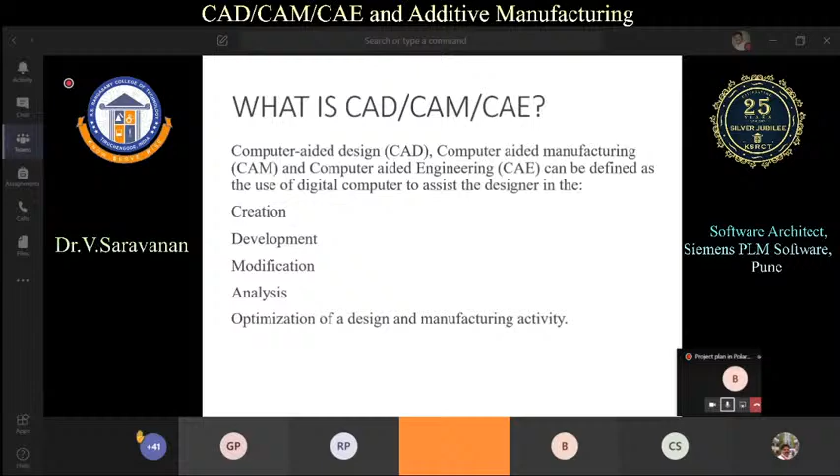As we know, CAD, CAM, CAE software - we have been using this software for various applications for designing and analyzing for the last few decades. These softwares are used for creating a model, developing, analyzing, and optimizing 3D models. Basically, we know this is a computer technology - CAD, CAM, CAE is nothing but a computer technology, and it will solve many of our design and analysis problems.

We might have encountered various CAD, CAM, CAE software in our day-to-day life. We might design some real life components, and do the assembly and analysis - all those operations we might perform. But the industry scenario is ultimately higher than what is expected. There is always research and development going on in real industries, and they are always looking for advancement in this area.

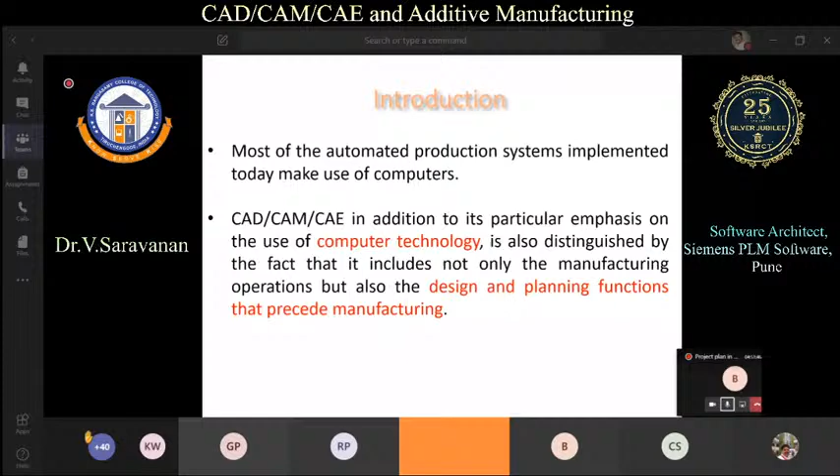So what we know is we will create a sketch, and we will create a block, and we will create secondary features, like we'll do some cut, and we will do fillet and chamfer operation. That's what we understand as a CAD model, but it is not just this much - there are a lot more things.

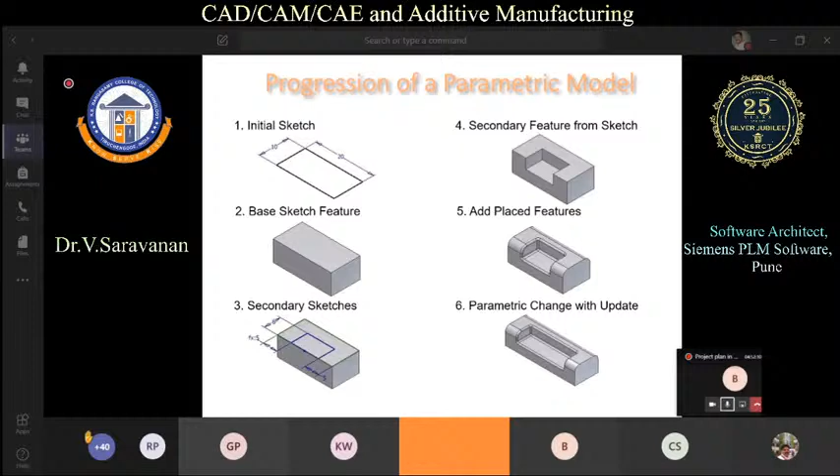So initially, if we see 1 or 2 decades before, we will use blueprint drawings. The blueprint drawings will be very big. The manufacturer will see that blueprint drawing and do operations in the lathe and create the models. But today, if we go to any manufacturer, they mostly won't use blueprints because the advancement in these areas is high.

So the reason, if you see 1 or 2 decades before, CNC evolution is bringing this CAD CAM systems up. Not only CNC brought this CAD CAM system up, other systems like computer hardware, software, all those contributed to CAD CAM, CAE applications softwares to bring it to this level today.

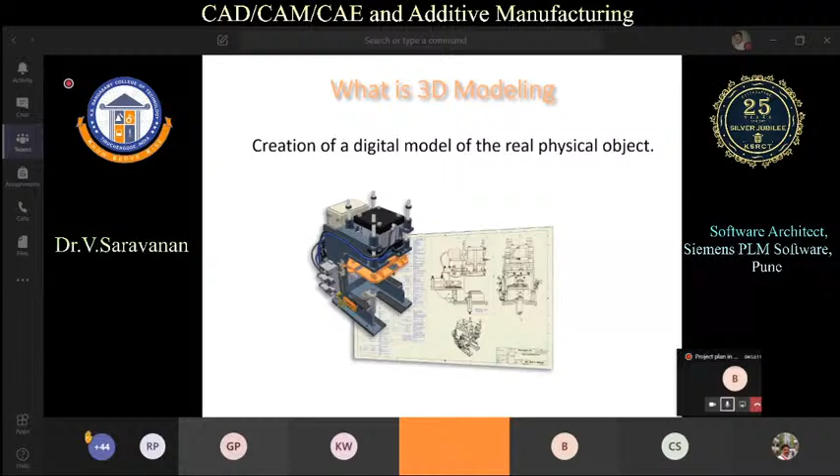Because of this, so far we encountered this much challenge, and we could make this kind of outputs. Not only is it aesthetically good looking, it has good performance. If you see an olden car, it will give only 10 kilometers or 8 kilometers per liter petrol. Nowadays it is giving more than 20 kilometers. That is the performance. It is lightweight, the materials are different. For all those things, these kinds of software's contribution is too much. It is contributing so much to this kind of technology, so that only it could be possible.

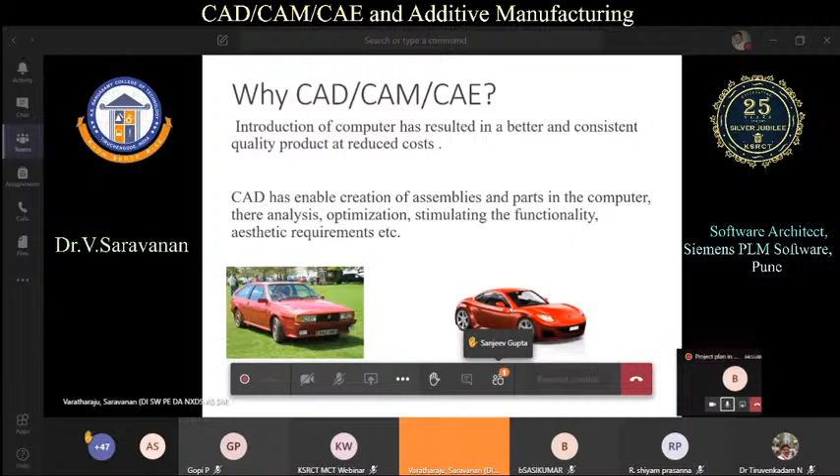If you see any CAD software or CAM or CAE software, we cannot see that alone for a design or analysis purpose. It is providing a system. If you take a car, there are so many systems involved in that. It is not only design involved in that - there are so many systems. We need to make sure the assembly is proper, and we need to make sure the control is proper. All those things involved in that, it becomes a very complex system.

In that kind of complex system, only one engineer is not enough. If I am a design engineer, that is not enough to solve the problem. There should be multiple collaborative design possible - then only we can achieve these kinds of complex systems. It involves mechanical, electrical, production, mechatronics, and software. There are so many softwares running inside that. Next, automated guided vehicles are going to come.

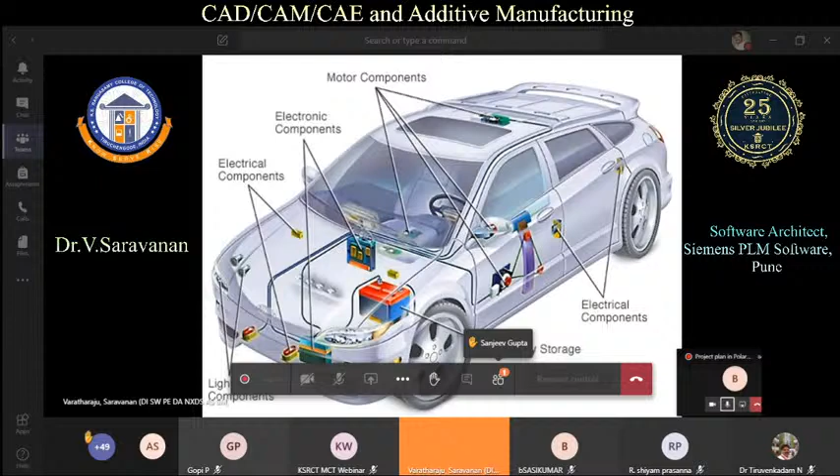It will automatically drive based on the programmed instructions. Those things are all not possible without this kind of software technologies. For example, if you see this assembly, it might have so many parts, at least 1,000-2,000 parts inside it, and we need to check the tolerance analysis. There are a lot of moving parts - it is not statically holding the loads. It should move, and at the movement it should reduce. It should have less friction, and it should have high performance and less weight. All are the targets - then only we could get the final output.

So we need to analyze all. Design is not only enough, we need to do all the analysis. Nowadays, if you see 5-10 years back, top softwares like Unigraphics NX or ProE or CATIA would have only features to develop a CAD model - just make a CAD model and do assembly. But nowadays it is not for CAD only, it is used for many other reasons. All those are important to the modern industries and modern requirements.

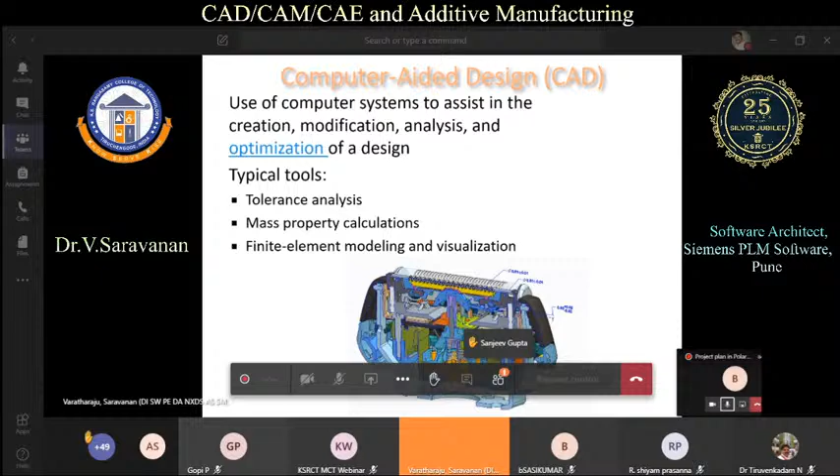To achieve that, we definitely need to work collaboratively. No one engineer or one stream of engineering can solve the purpose. There should be multiple people involved, all working together. That's why today's software, we used to say it is collaborative design. The customer will ask something, the designer will do some design, and the functionality designer will say this should be the final output. All people have to work together - then only it is possible to achieve this kind of high-tech design or high-tech output. So I will show simple videos, just a 1-minute video, of how collaborative design is working.

Sir, Saravanan sir, kind request, sir. Yes, sir, your audio is not clear. Okay, video is clear while playing it, but audio is not coming. Okay, this is just 1 or 2 minutes, I have 1 or 2 other videos, but it's just a 1 minute video. Okay, okay, so okay sir.

I will continue. This is not only with CATIA software. Most of the big software has all this architecture. Internally, it will allow people to collaborate and do design.

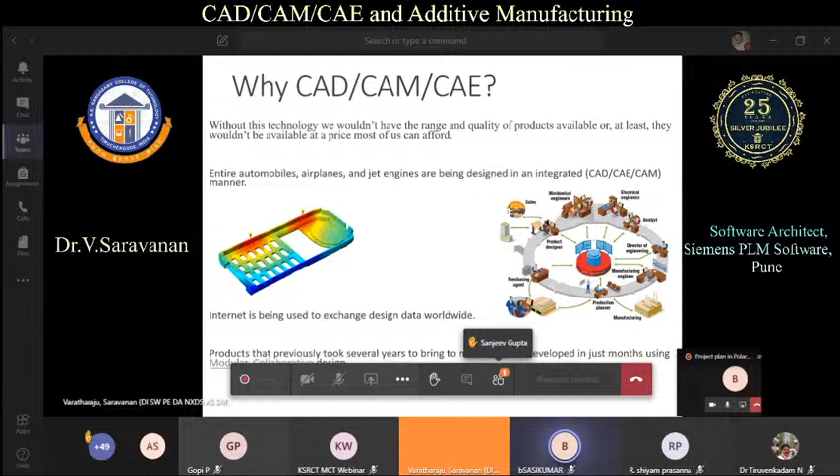So initially we know basic surface modeling, solid modeling, but it is not enough. Surface modeling and solid modeling together in a single part is not enough. We need to have a finite element model, meaning it should be a meshed model, a discretized model, which we call a discretized model. It will be triangle or quad shapes. So for analyzing, this is required.

So I am interested only in the area where I want to do some analysis. I don't care about other assembly parts. It is costly. Even if you go to analysis software, it will be costly. It will take months and require many designers and CAE engineers for doing that job. To avoid that, within the same model, it is possible to create a meshed, discretized model and analyze. These kinds of options are already coming in the CAD system.

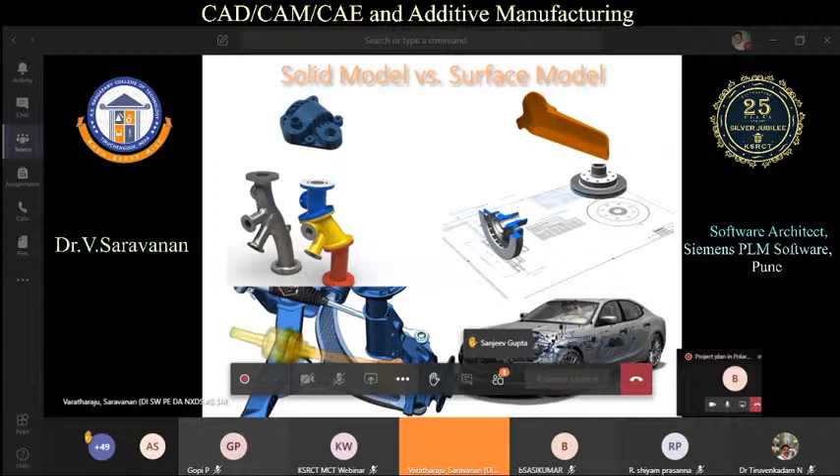So these CAD, CAM, CAE softwares are not only useful for designing automobile or aerospace applications. They are used in other applications too. In CAD terms, if it is a mechanical application, it is called MCAD. If it is an electrical application, it is ECAD. It is classified like that. This architecture can also be used for building strength analysis, and it is used in architecture and PCB manufacturing and design.

It is possible. For example, there is an oil well or petroleum resource. Even humans cannot enter sometimes because it is dangerous or not allowed. So there we have to manage - we will put some sensors and design it in the same software, either through reverse engineering, and monitor whether those systems are working properly or have some problem. So those systems should also be available in this software.

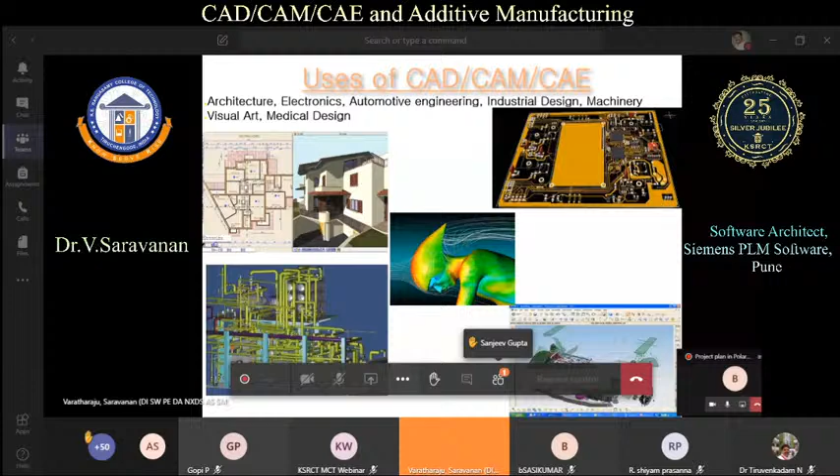That's today's scenario. If we look at the tools initially, manual drafting was common, which we might have seen in our school days, and then it increased - the famous 2D drafting tools became available. Then 3D came in, and now it is going further. Earlier, if you see, a 3D model had to be fed into CNC separately. Nowadays that's not required - we can connect this software directly to the CNC machine, and it will make the components.

Now the next level is additive manufacturing coming in, so these CAD, CAM, CAE softwares should satisfy the additive manufacturing requirements. I will go through those things in the coming slides.

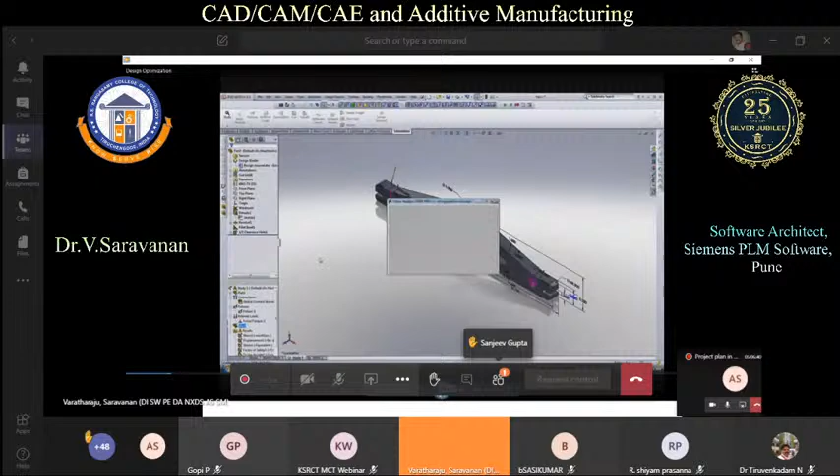So a designer did some basic design, then gave it here. It will change the design and go to CAE analysis, performing the CAE analysis, and final validation will check whether it is acceptable or not.

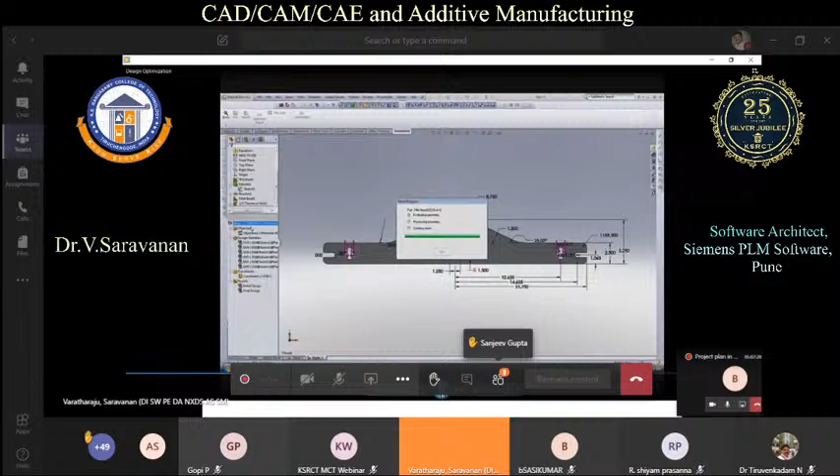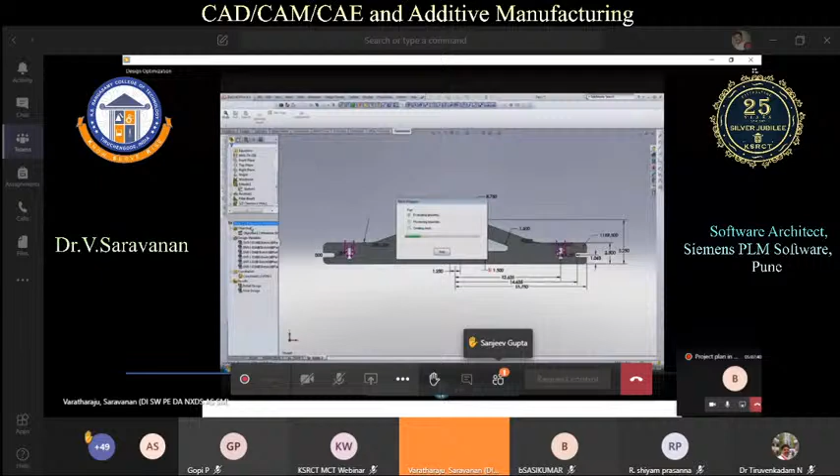Internally it may use non-traditional algorithms like genetic algorithms or neural networks, and it will find out whether the output is meeting the objective or not. Then it will perform again from the design - change the design, do CAE analysis, and check the output result. Like that it will perform multiple steps to get a fruitful result. That kind of performance and options are available today.

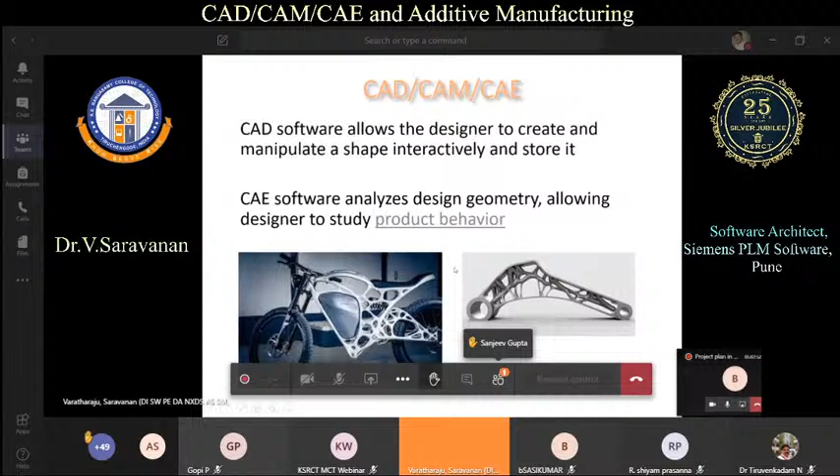So just I will close this. That's all. Now as far as the CAD model is concerned, we will see the CAD model only. So what are its applications?

We can use the CAD model for CNC manufacturing, additive manufacturing, and automation. If you want to do some automation and analysis, then it is useful, and it can be used for visualization, simulation, and analysis. So the CAD model is applicable or useful for downstream industries.

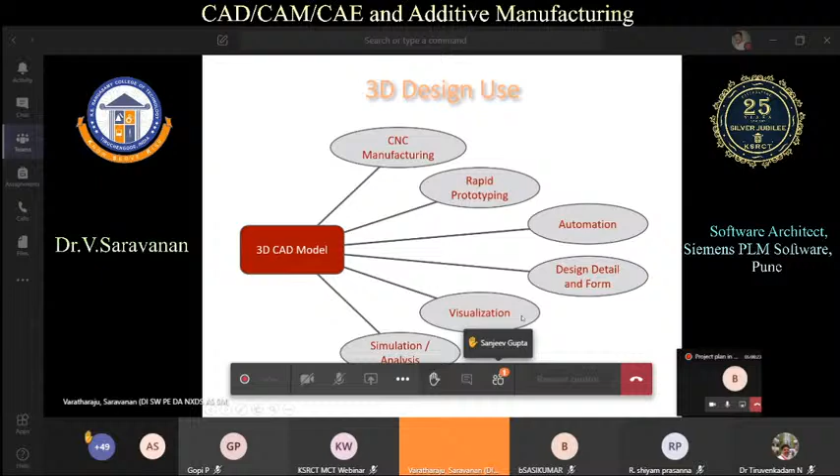For example, even if you see any electronics component, there will be some thermal analysis. It will generate heat when we are talking on a phone, it will generate heat inside. So the material should withstand that heat. Suppose it is falling down, it should withstand that too. So software will do a drop test - once you drop it, it should not affect internal components. That's how they design it.

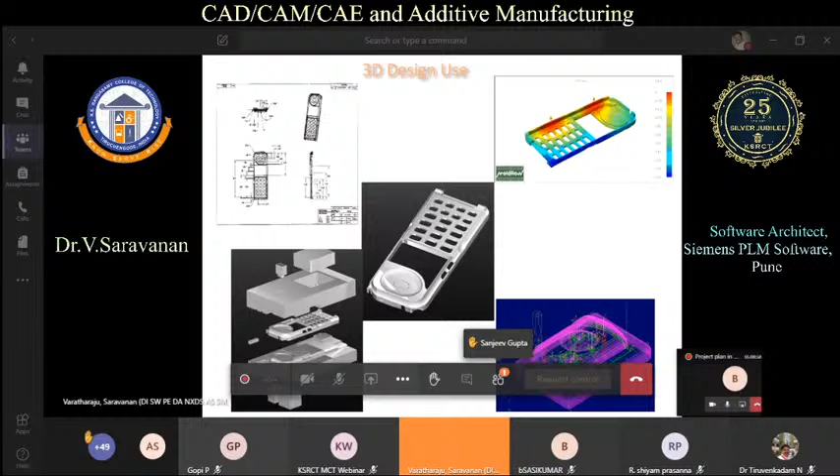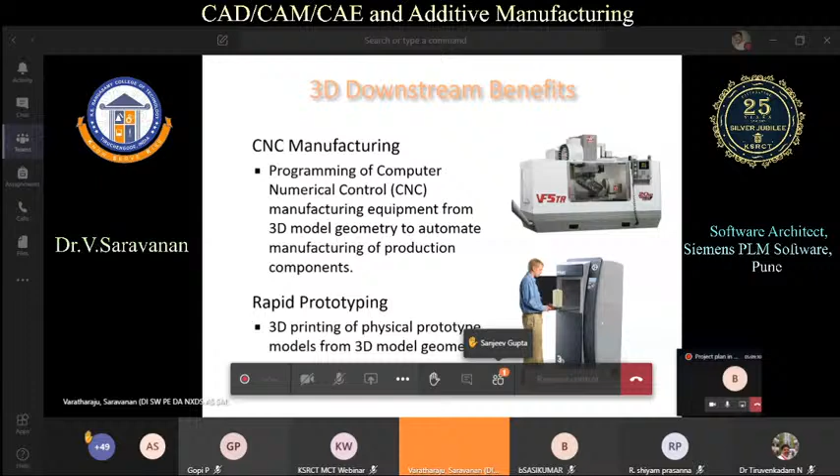So a lot of other internal testing will happen virtually before going for manufacturing. As I already mentioned, this CAD model can be used for many other downstream applications - CNC, rapid prototyping, automation, and checking design details.

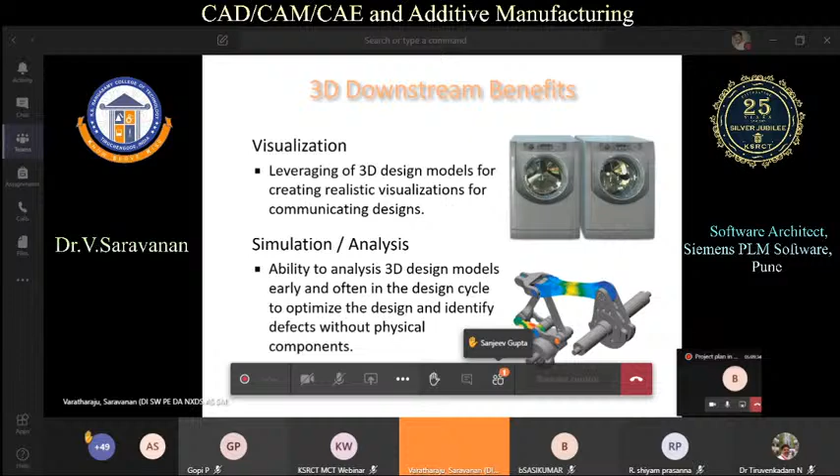Not only that, aesthetically we will visualize whether it is okay or needs some changes - we can visually evaluate those things, and finally we can simulate using finite element software.

So these are all, we cannot separate them. Nowadays, earlier CAD software used to be separate, CAM software separate, and CAE software separate. But nowadays it is not like that - it is all one platform, bringing all software together.

If you see these big companies, like ProE - we know it because we might use it in college - PTC is the parent company and they have 20 other products. ProE Creo is the latest CAD modeling software. Similarly, they have finite element analysis software, CAM software, everything.

Similarly, Siemens has CAD software, CAE software, PLM software, etc. So for each company, CAD software alone is not enough - it needs other applications also, and all are integrated in one single software based on the user's license. In one platform, one UI, the user can perform all the operations. That is today's software.

So if you see CAD CAM - CAM means computer aided manufacturing, how computer is useful for manufacturing. But we will come back to my first point - CNC is the CAM software, and it is used for CNC and manufacturing.

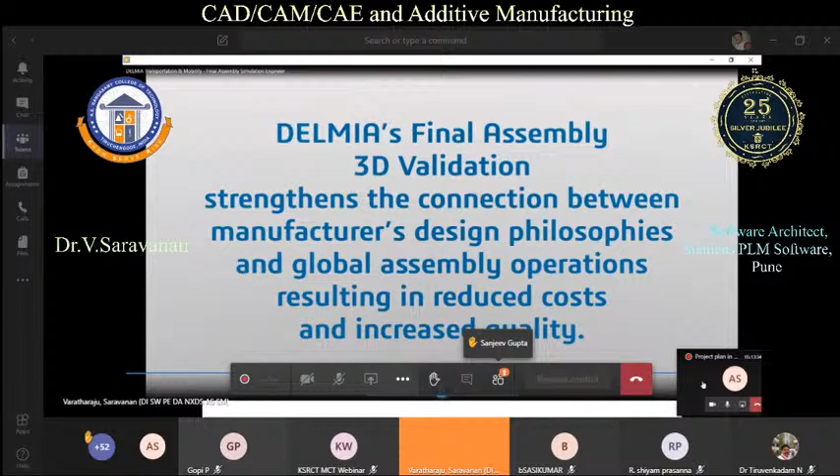Before going for plant implementation and actual production, industries will do all this analysis to find any bottleneck resource, even human beings. There is a module called human, where we can model humans and give input like how efficient he is, how much he can bend, and how much load he can handle. With all this input, we can find out how many human beings are required, how many machines required, how many assembly lines required. All those things can be pre-planned before entering the actual production system.

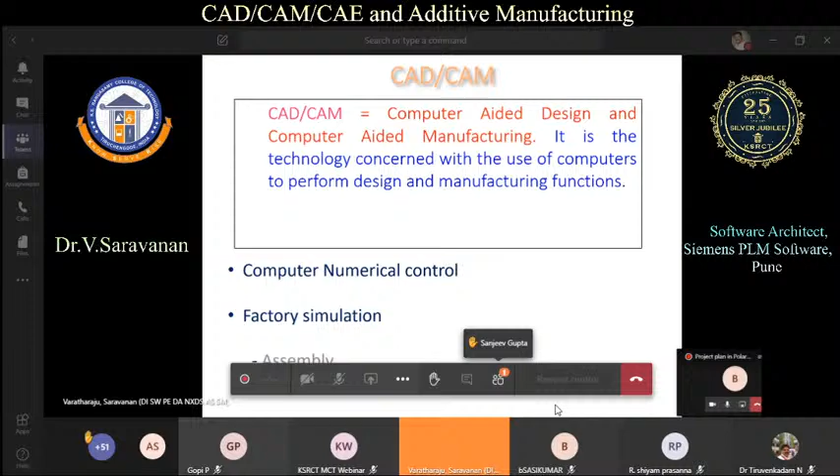So those things are possible with this software. Okay, so now we see CAD, CAM, CAE.

We are generating a lot of data, it will be in GBs, right? GBs, TBs. So how to handle that data? If there are multiple engineers working on it, how do we manage it? This is where PLM software comes into picture.

For example, this PLM software - Siemens has Teamcenter, Dassault has ENOVIA, and PTC has Windchill, etc. So each of the big CAD systems internally has their own PLM software, which is a specific software that handles internal data.

These PLM softwares will handle the data very smartly, and without any headache, we can easily go ahead and manufacture the components.

It will take care of the life cycle of the component, from the raw material to the supplier, and not just until the supplier, but the manufacturing also. It will keep note of each product with some IDs, and after delivery to the supplier, we know which supplier is using that ID component. Not only that, afterward it also takes care of the life cycle of the component - how much it is withstanding, how much time it will withstand.

Then artificial intelligence style analysis will be performed on how to improve the life cycle of the component and what material needs to be changed - all those analyses will be done.

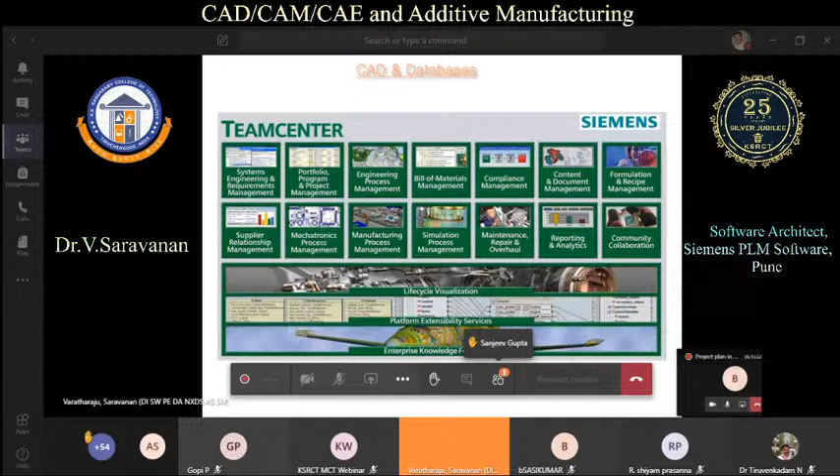Now, these CAD, CAM, CAE softwares, so far till the last decade, say 2010 or before, were mainly used for downstream applications, which I mentioned earlier, like CAE analysis and CNC manufacturing and automation, etc. Those things decided how this system had to develop or evolve. But now additive manufacturing has given a lot of capability.

Earlier there was a subject in engineering called design for manufacturing and assembly. That means we have to design any component in a system considering how it can be manufactured, otherwise that design is false - even the software itself has constraints. For example, if I design something entering deep into a small feature, that design may be wrong in lakhs of cases. So to avoid those kinds of things, we always say design for manufacture and assembly analysis.

So now another term comes - design for additive. The design itself will change between normal manufacturing and additive manufacturing. That is the difference.

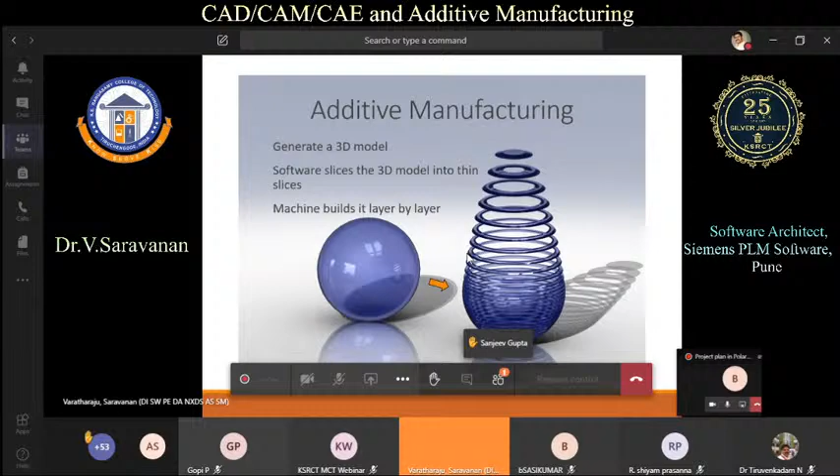So you might hear that additive manufacturing is nothing but 3D printing. Earlier it used to be called rapid prototyping. It is not just one type - there are so many types, at least around 20-30 types of additive manufacturing.

So these I am just highlighting, I am not going in depth on each type. Some basic types I will give you a basic intro on how it is working. Say for example FDM, fused deposition modeling. If this is concerned, we can use it even at home, even at our office, we can have a printer and make any component and prototype it. That is the possibility. Earlier it was not at all possible. Without this technology, never ever possible. We cannot do any prototyping, we cannot make a new component. It would be possible, but it would be very high cost. We would have to make a die, spend lakhs for manufacturing dies. But nowadays it is possible. Within a few thousands we can buy a machine and make prototypes. So that is possible at home itself.

Even our kids can play with that, we can improve our kids' innovation. So again, it is not all together - we cannot say one machine can solve all the purposes, one technology can solve all the purpose. So there are many types of 3D printing available.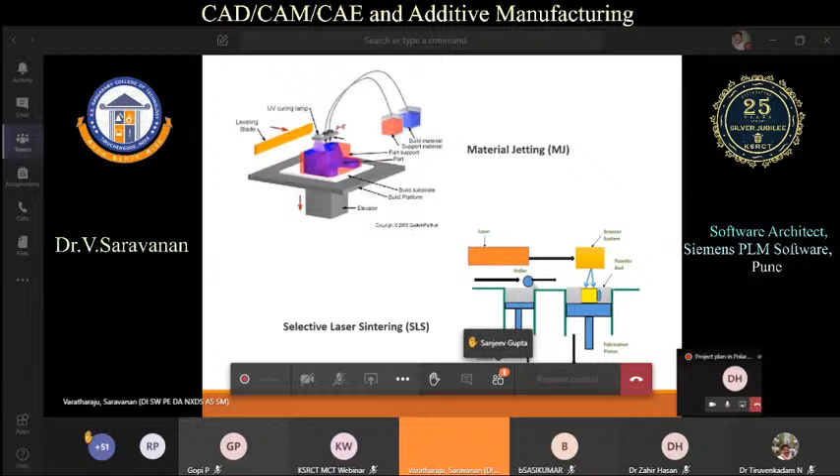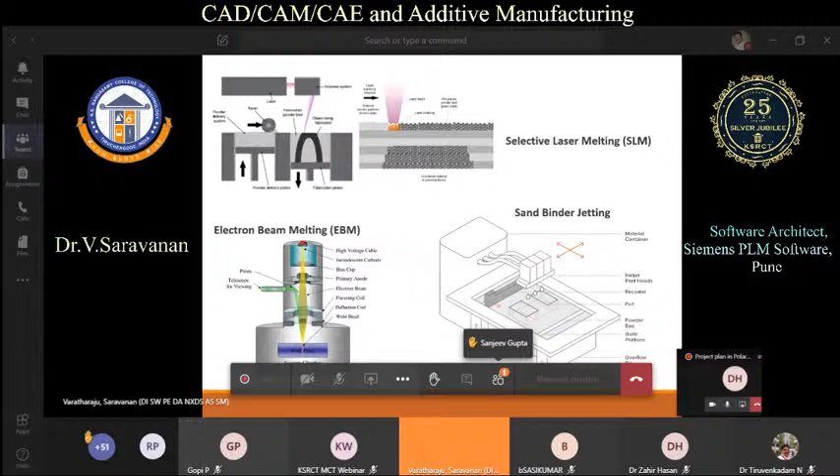And sand binder jetting - this is where sand particles can be bound together, which we might see in foundries for casting. Now making that outer sand mold is possible by 3D printer. It is available today itself for making those sand molds, working with sand binder jetting. So this is another technology.

So there are so many technologies and so many materials - it can be aluminum, steel, or plastic, ABS, PLA, alumina, zirconia, a lot of things. Still additive manufacturing is not supporting all the materials that conventional manufacturing supports. So it is evolving day by day to support more.

So why do we want to go for additive manufacturing? There are a lot of reasons. If material is concerned, for example aircraft components are very costly - if we take titanium, zirconium, cobalt, these kinds of materials are very costly. Even automobiles cannot bear that much cost, but aircraft use such materials. Machining costly material like that wastes material, and we cannot waste that because it is costly. So similarly, that is why the aeronautical industry adopted this.

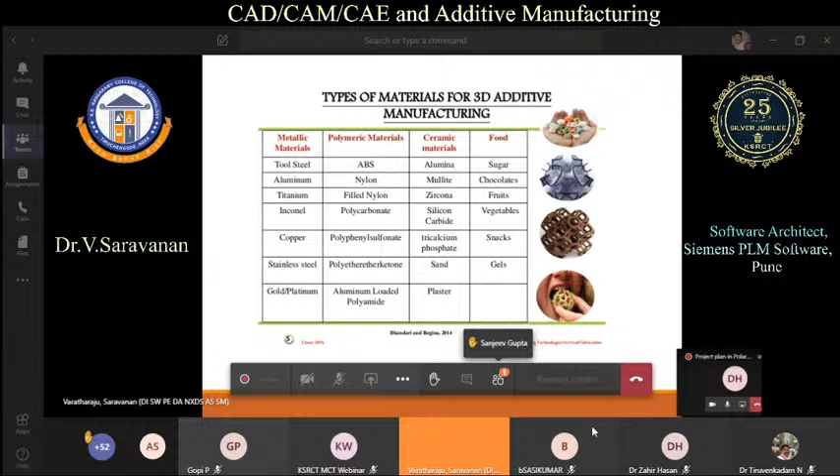The aeronautical industry was one of the first industries to adopt this additive manufacturing, and they are still major contributors to improving this kind of technology. Not only for this material - we can use food material too, chocolate 3D printers are there, or pizza making 3D printers are there. There are so many applications we can use it for. What is the advantage of that? It is only design - some enthusiastic people will like those things.

Of design, if you see Western countries or Dubai and all, the buildings will be very uneven, not like a square and just a balcony, not like that. It will have a very fantastic design. How to design these kind of things? They can design using CAD systems feature. So we might know only those kind of features to create a model, but there are so many things.

It can programmatically create these kind of models, things that we cannot make otherwise.

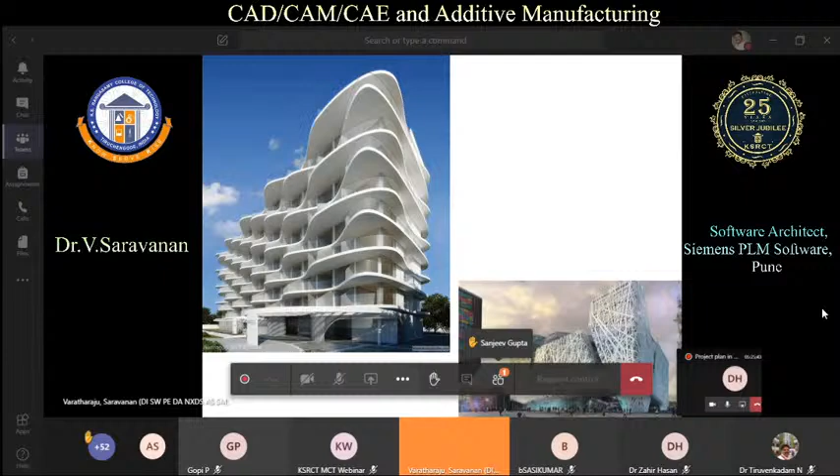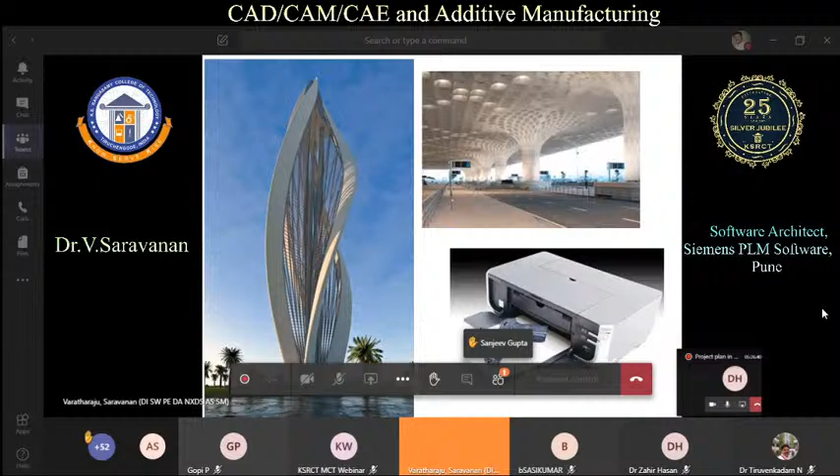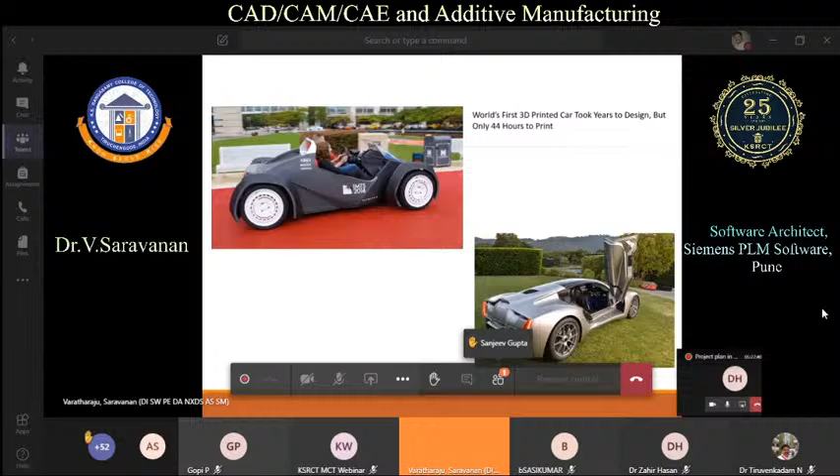So this is a supercar, again using additive manufacturing. The chassis and some other parts use additive manufacturing. You can search the media to get this information if you want.

If a hand or leg has some problem due to an accident, earlier how to manufacture this was unique, it cannot be fit for anyone else. So in that case, additive manufacturing is helpful, it is helping a lot actually. You can make unique components like this, no need of die or nothing. If it is mass production, then definitely we will go for conventional manufacturing, but for these kind of unique components, we have to choose additive manufacturing.

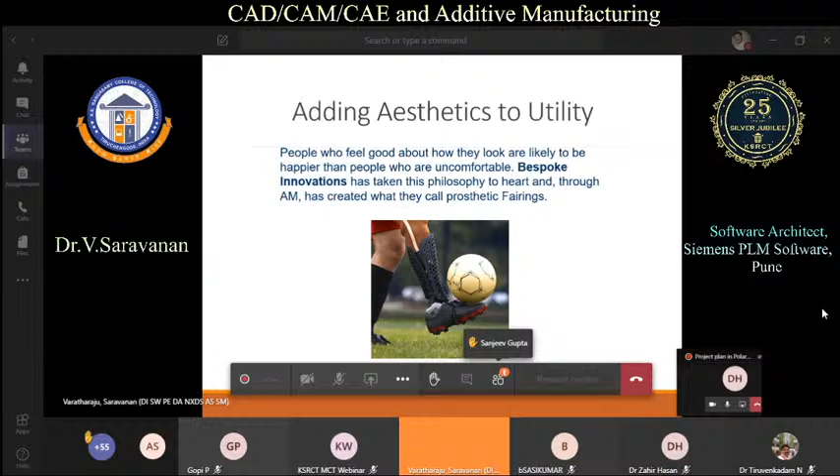Not only that, in the construction industry, buildings are made up of additive manufacturing. This technology is coming up, there are quite a few companies in the market building these kind of buildings using additive manufacturing. It is simple, the technology is the same, layer by layer, the machine is given XYZ stops. That's all, it will build the 3D parts.

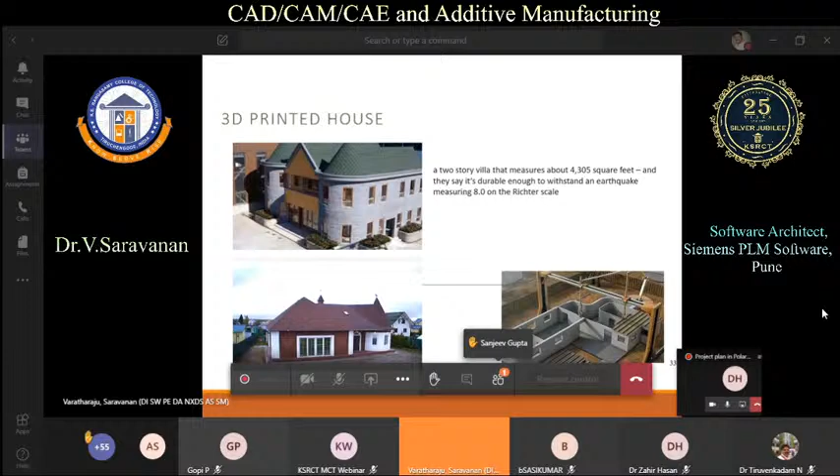The advantage is it can be quick. You might have seen recently, the coronavirus, China, the Wuhan city, they built isolation wards and all using 3D printers. So that and all was easily possible, right?

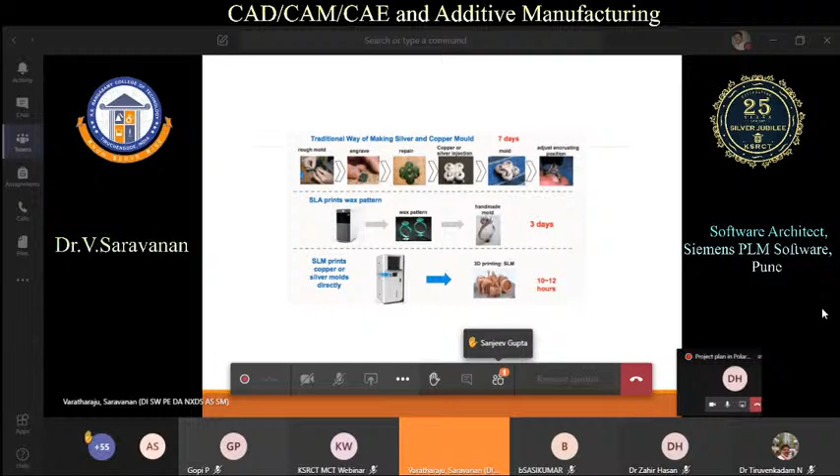That is the main advantage of this kind of technology. Not only that, medical and jewelry industries are using these technologies to reduce their lead time. Earlier, if you go to a jewelry shop, they will take more time to finalize the design. But nowadays, if you go, suppose they have this kind of rapid prototyping machine, they can give the prototype, convince us, and show whether the design is okay or not, then they can go for full production.

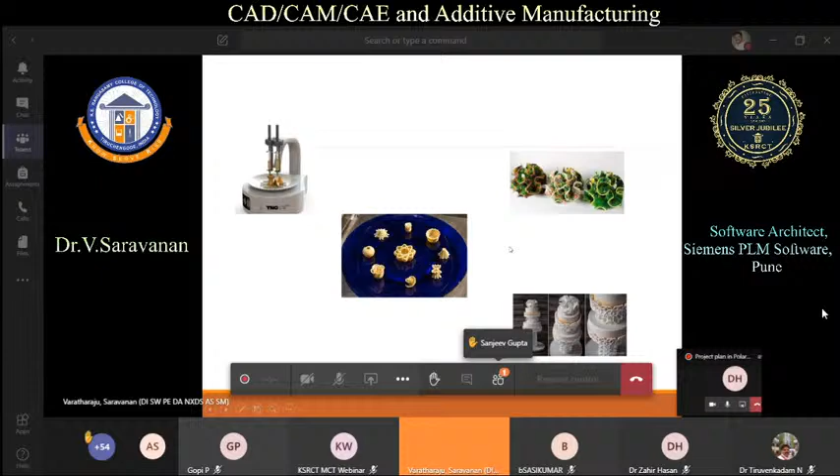Not only medical industry, but engineering or any stream can use this technology for preparing models to explain to students. Without these models it may be hard, but if you give the model to the student's hand, they will feel it - how the heart is functioning, what different walls are there, they can feel it instead of seeing it in a picture or video. Even in engineering, instead of saying 'one gear assembly gearbox', if you make a gearbox with rapid prototyping, it is quick since we have the machines. We can show it to students so that they will be happy and won't forget, because they felt the technology. So those are the kinds of uses for 3D printing.

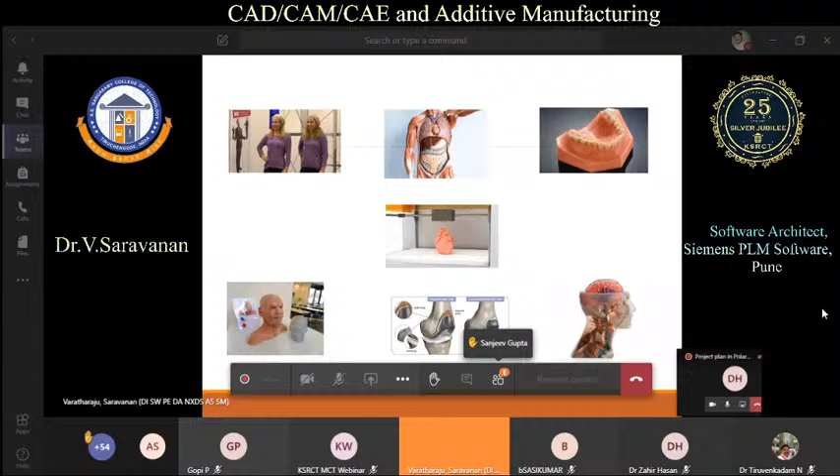This is again the skull replacement - this is unique. If due to some accident or some reason the skull has damaged, we can use this technology to make a specific design skull and replace it. People are using it, even in India - there are some companies doing this in Mumbai. They are making this kind of thing, mostly going for metal parts, and they design a unique component. Unique means that particular part will not fit any other - it can only be used for that particular person. So that kind of component we cannot make with a die, it will be costly. So this kind of 3D printing can be used to do it.

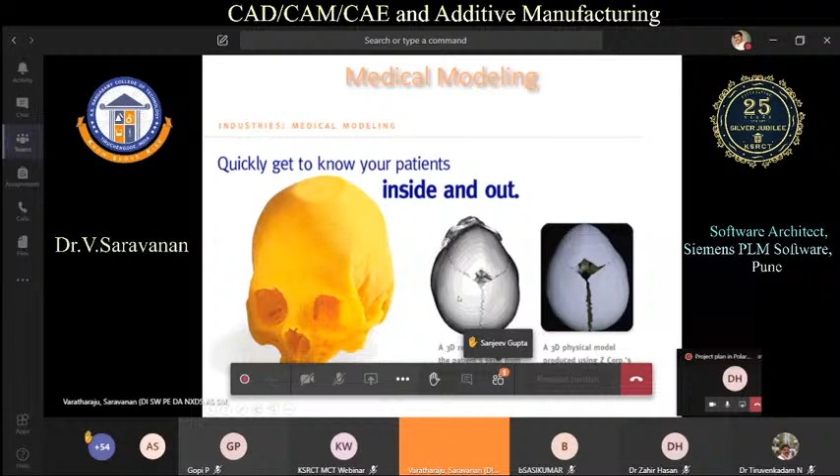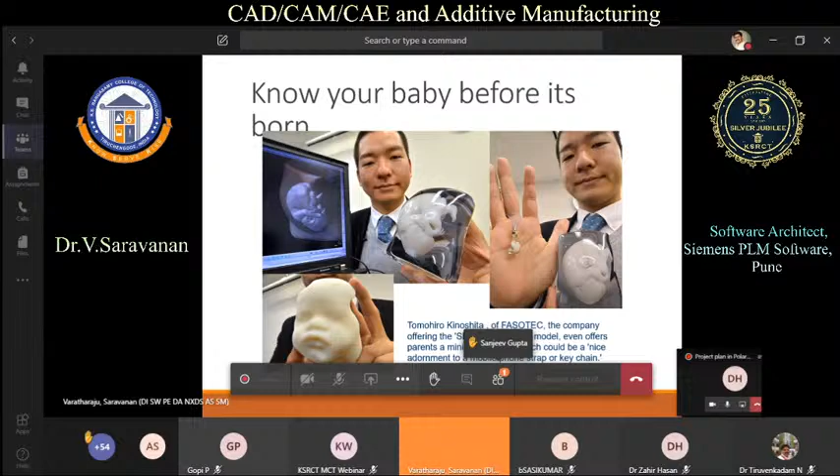Recently we know how this technology, additive manufacturing, helped for corona cases - making masks and ventilator valves. These were all highly demanded things. I have quite a few friends who made these kinds of things in thousands and distributed them to policemen or doctors, so that they will be happy and safe from these kinds of problems.

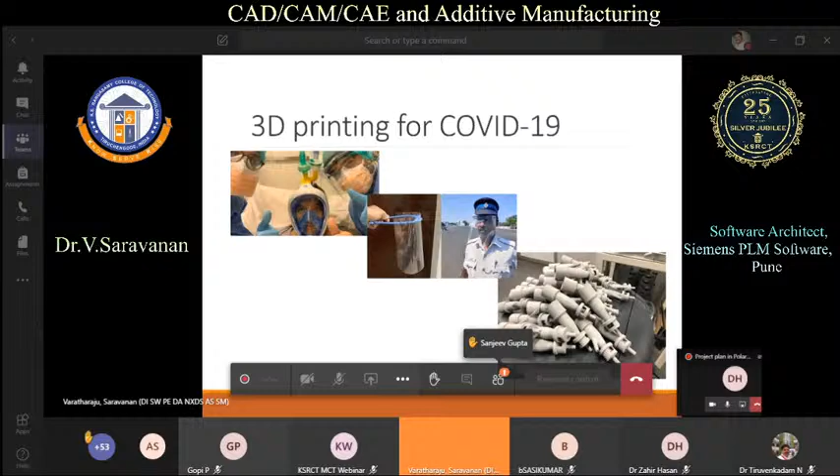If you see the history, this did not evolve in one day or one decade - it took long. In 1980, the first 3D printing technology was patented. So it took decades to come up to this level. Even at our college days, we might have seen it only at lab level - it hadn't evolved. Only in the last 10 years has it evolved. The main reason is the patent got expired, so people started using it. Now this technology is available to individuals like me and you - we can play with this technology, there's no patent problem. Yes, there are some big companies doing a lot more than today, so improvements will always come. It will evolve over the period - it will not happen in one day or one decade, it will take multiple decades to come up to this stage.

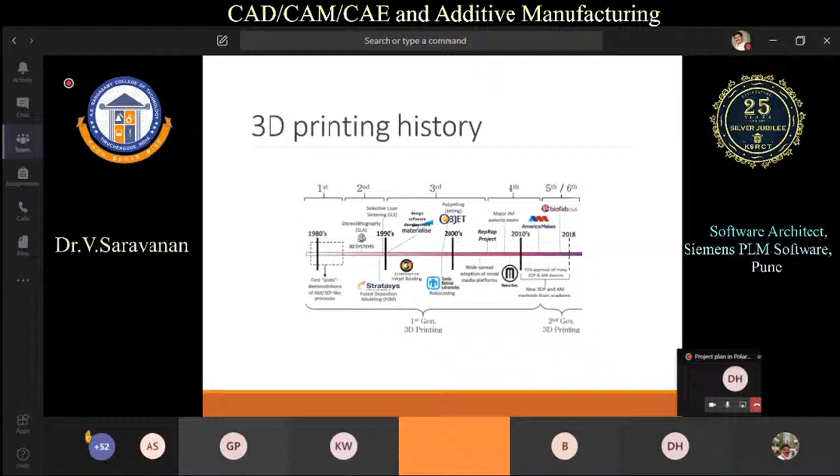Okay, what next? We are having additive manufacturing under CAD, CAM, CAE tools. Is it stopped? No, it has a lot more to do. So this is the future - so far what we discussed is what is current and what is past. So what is next in this?

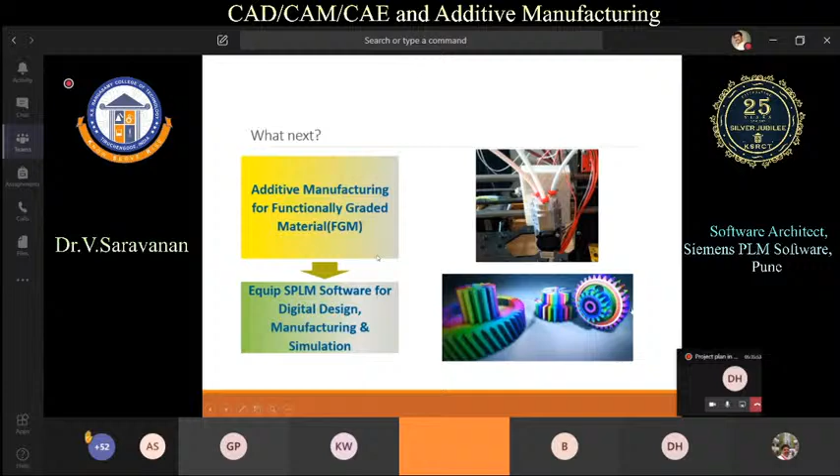Functionally graded material. To manufacture a functionally graded material, right now there is no straightforward mechanism or manufacturing technique. I will go through a few more slides - what is functionally graded material, why is it required - so that you will understand. These kinds of functionally graded materials are not easily manufacturable today. So it should be possible.

Functionally graded material means I have one component - at one end I have one material, say copper, and at the other end I have stainless steel. That is my single component - it is not welded, not assembled, it is a single component. It has one end with one material, one composition - one chemical composition - and at the other end it has a different composition. How to manufacture this? It is very difficult, right? Do we have any application? Yes, there are so many applications - I will go through the following slides. Yes, this has so many applications, it is very functional - that's why it is called functionally graded.

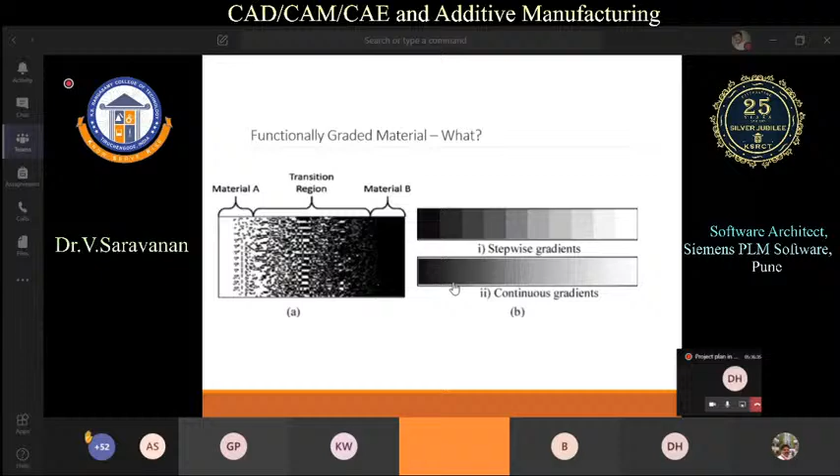So that will be the future. And composite material - we know aircrafts are using composite material. More than 50% of the aircraft parts are composite material. Why composite material? The reason is it is very lightweight.

Say for example, if you go to some cycle shops, if you take some normal cycles, it will be 5,000, 7,000. If it is aluminum alloy kind of material used for frames, then it will be 15,000 or 20,000. If it is composite, that is the difference. Yes, it is lightweight and it has more functional value, so that's why people want this kind of composite material.

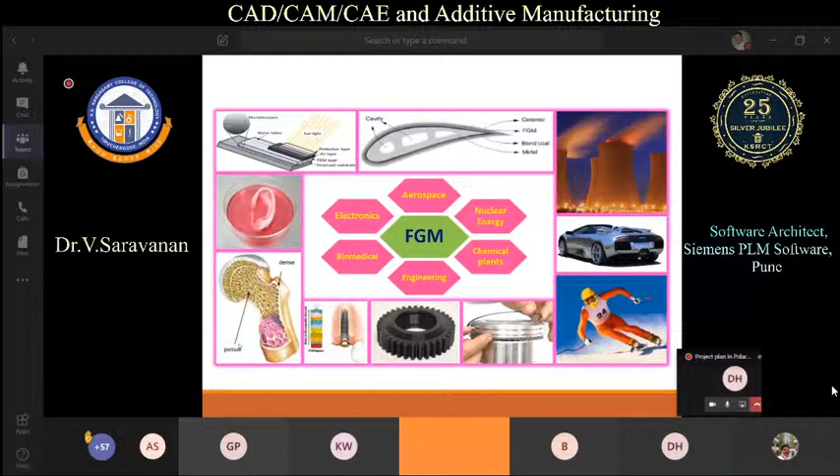Say aircraft wing is another, and this IC engine - the IC engine components can be a functional grade material. So there are so many things. The reason is, if manufacturing technology can make this, then there is so much use of this kind of technology. Right now it is using very little. So once manufacturing technology makes these kind of components, then definitely this kind of technology - additive manufacturing is one manufacturing technique to manufacture this FGM using FGM materials.

Different porosities and different nature, and this is nothing but FGM - we want to replace our bone, replacement or those things. If we could make a functionally graded material, then it is lightweight and less problematic, right?

But this is again not new technology. FGM was invented, I think, in the 1980s or 90s in Japan by some researcher, and because there was no manufacturing - even CNC was not that evolved at the time - it progressed slowly. But some technology like additive manufacturing picked up this opportunity, and then it became very powerful.

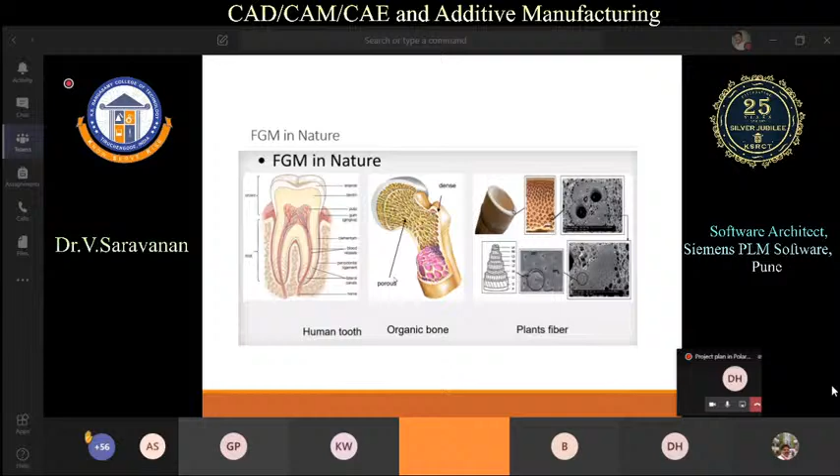This is how additive manufacturing works in dentistry. It is not only for manufacturing; it is used for doctors also. If we go to a dentist, they will ask for multiple visits - we need to go track the status, make the mold, and they will prepare it for fitting to us. At least 5-6 visits we need to do for these implants, but using additive manufacturing, we can reduce the number of visits and it will give an immediate solution.

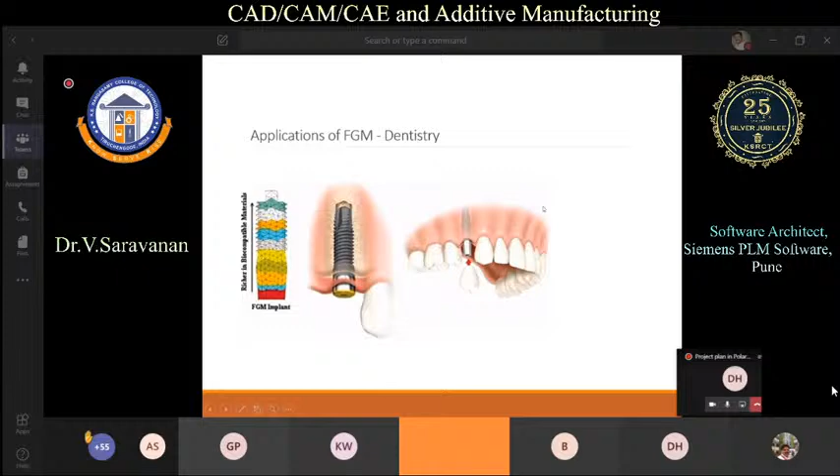So this is some other applications of FGM materials. Okay, so we've seen what is 3D printing, what is the application, and what those things are. What is next?

It should be possible, bio 3D printing. So far, whatever doctors used, whatever I explained, is real normal material, with which we can make the component and doctors will use that. But this is bio 3D printing, so the component itself is biomaterial, it's called bio ink. Using bio ink, with a very precise machine, they can make this ear. Again, this ear is made up of biomaterial. It will grow day by day, it will grow, it will function. It is living organs, living tissues, living cells.

That kind of thing is possible. A lot of research is going on, and even in India there are a few companies coming in with this technology, called regenerative medicine. Whenever tissue or cells are damaged, they can bring up these kind of things. Right now it's not possible to do a heart replacement, we cannot make a heart using today's bio 3D printing, but heart valves are possible with today's technologies.

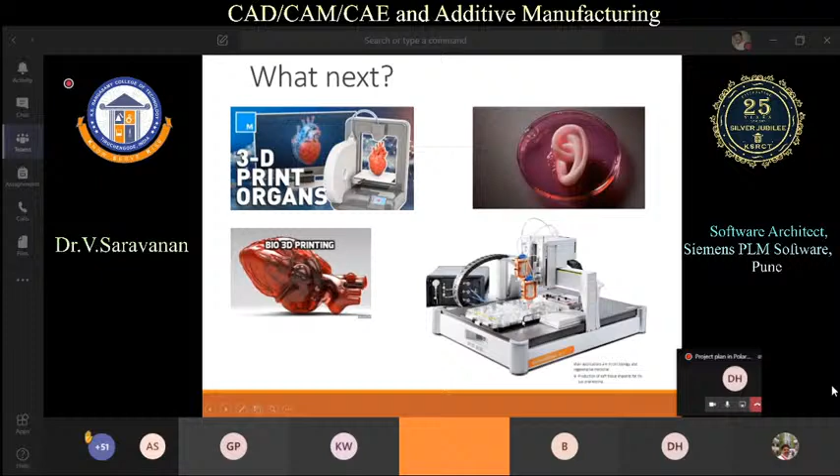It will improve, because body parts are very functional and have a lot of complication. For example, inside it will have some property, and outside surface it will have some other property. So how to make those kind of components? As manufacturing or mechanical engineers, we think in the direction of how to manufacture that. We have to make machines like this so it will be more precise and useful for society.

Right now they are making many parts, and not exactly replacing, they are using animals for testing nowadays. Theoretically they can make anything, body parts. We can make body parts with living organs, tissue, cells they will make.

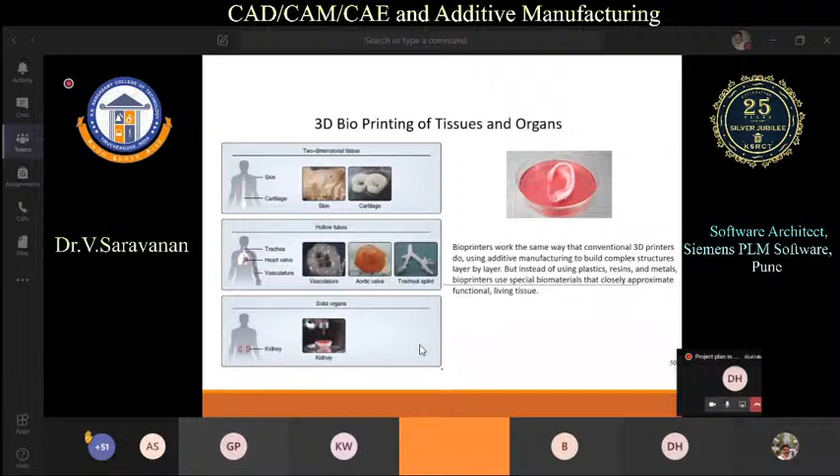How are they making it? Simple. Say I have a valve problem, we cannot take a cell from other parts, we cannot take a cell from skin and use that cell for valve printing. So they will take a small cell from the valve outer surface and multiply those cells, then prepare a bio ink, and those inks are used for printing that component. How do they print? They get the design either by scanning technique, MRI scanning or similar, and they can get the 3D model. So they have a 3D model, they have bio ink, they can make a component. Theoretically that is the logic, and at some level they are successful, and a lot of research is going on in these areas.

Yeah, so this is something, this is some of my trial and prototyping. I used to play with these kind of things using multi-material, multi color printing, etc.

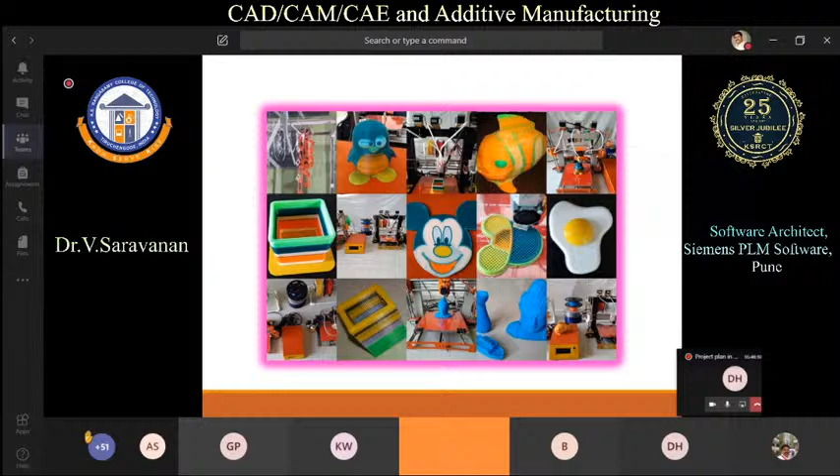Okay, opportunities. So I explained so far so many things, so many complications. Machine learning and IoT, all are required here. Whenever we want to model something automatically, it has to learn something, and we have to use artificial intelligence or machine learning, and we need to use IoTs.

So IoT manufacturing, or IoT in CAD system itself - we can place an IoT system, say any sensors, and those things will perform logically. So before going for manufacturing, we will place those components virtually. So there are so many opportunities.

We can explain - these are the many streams available, and there are so many opportunities. We want students, young engineers for these various fields. So what they need to know is simple - they need to be strong in mathematics, they need to be strong in some programming language. These are some basic requirements, so they can be well fit into this. The markets or industries are looking for those kind of people.

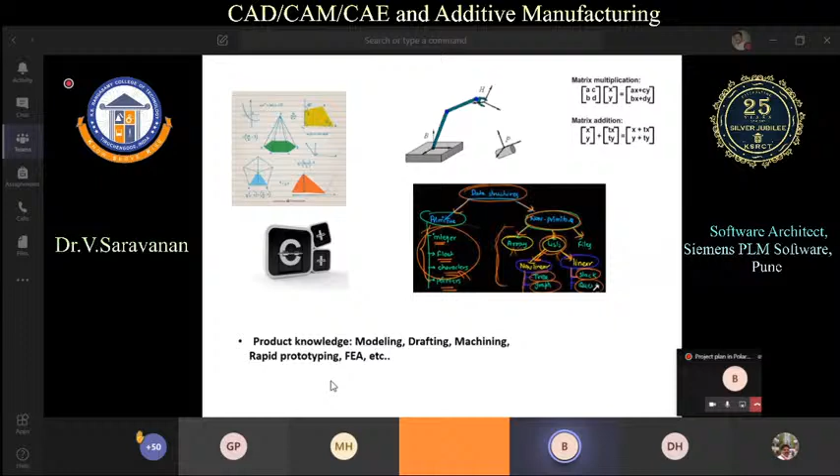Hello, hello. Sir, can you share your PPTs? It is more informative, sir, please share it. Your voice is not audible, can you share your PPTs, sir? PPT? Yes sir, PPT, yes sir. So which slide are you looking for, sir? He can ask whether you will hand over the PPTs or not. Okay, so I will hand over the PPT, sir, soon. I will give it to you so that you can check. Okay, thank you, sir. So any other queries?